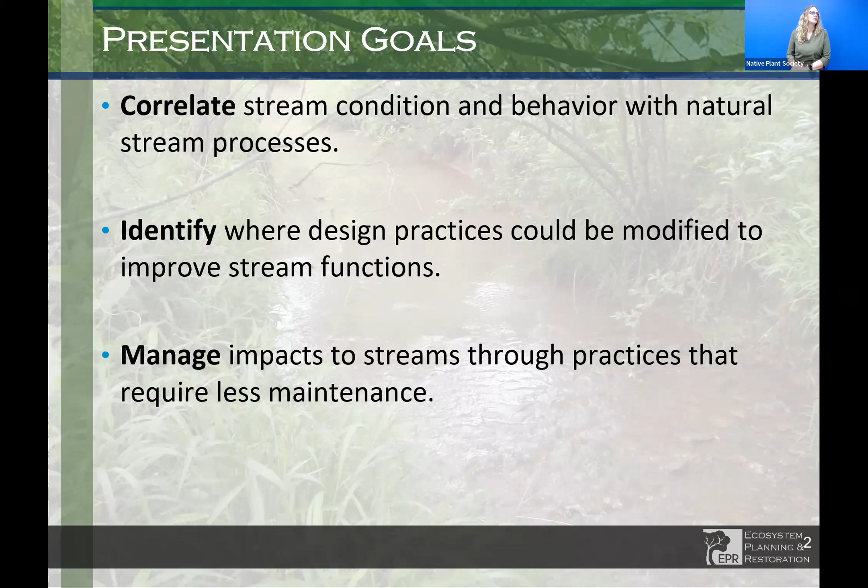So we will be talking about natural stream functions and processes, channel instabilities, and we have a local case study to show you, and we'll do questions and answers when we're finished.

One of the questions we like to ask - and it kind of depends on who you are and your worldview and experiences how you answer this question - is, what is the function of a stream?

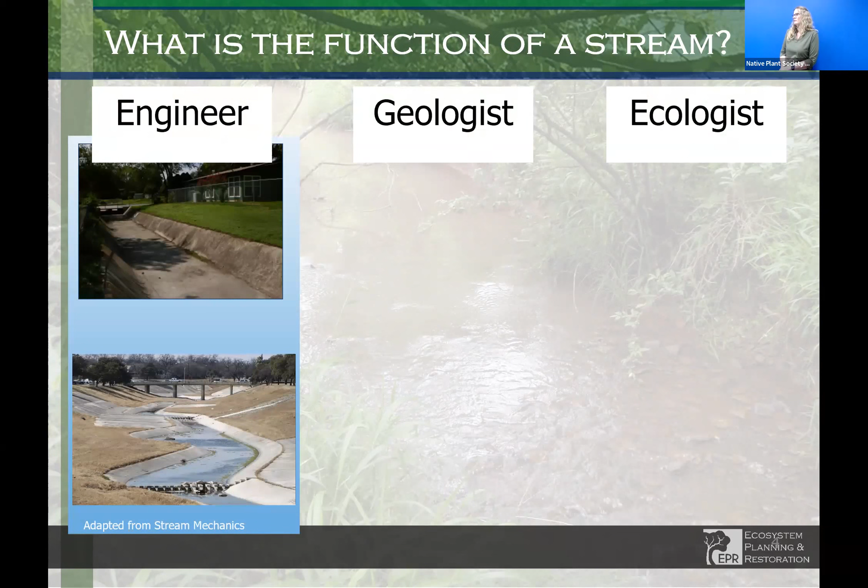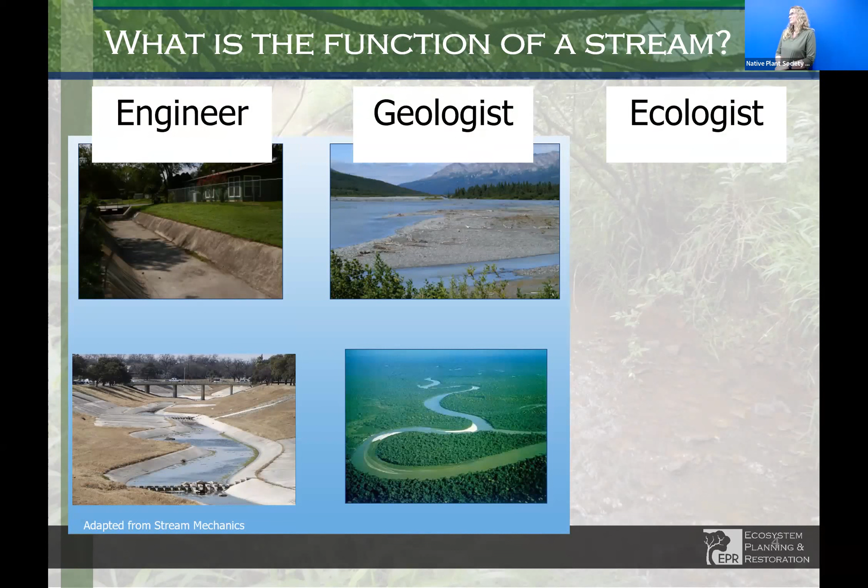If you're an engineer, you might say it's to move water, to get flooding and stormwater out as quickly as possible. If you're a geologist, you might say streams move sediment and help shape the landforms. If you're an ecologist, you may think streams are habitat for aquatic animals and fish.

And all of those answers are correct. Oftentimes, projects get kind of tunnel vision depending on who's put out the project and what the goals of the project are. But we like to think of all of these things when we think of a project.

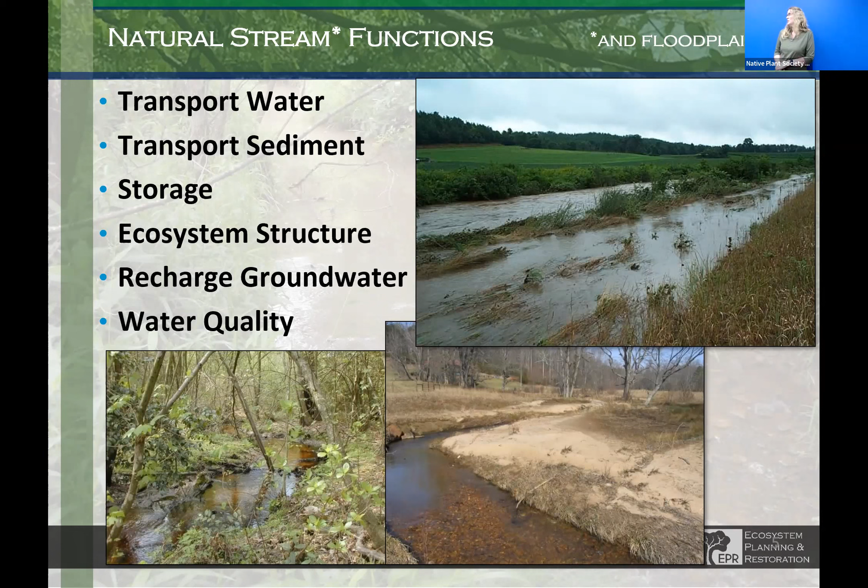So when we talk about stream functions, we also include the floodplain, not just the channel, but the floodplain that conveys the larger flow events. These systems transport water and sediment, provide flood storage and sediment storage, provide ecosystem structure for plants and animals. Sometimes they even recharge the groundwater, and they have a lot of water quality benefits.

So when we think of streams, we kind of zoom out. The first thing we want to think about is where are we in the watershed? Different streams will behave and have different characteristics depending on where you are. If you're up in the headwaters, you might have a steeper stream with a different shape and plan form than a stream down in an alluvial valley, where it's flat slopes and you have this nice meandering stream system.

So whenever we look at a stream and a potential project, we need to think about where we are and what kind of stream is appropriate for this site. What should it look like? What does it look like? And what can we do with it?

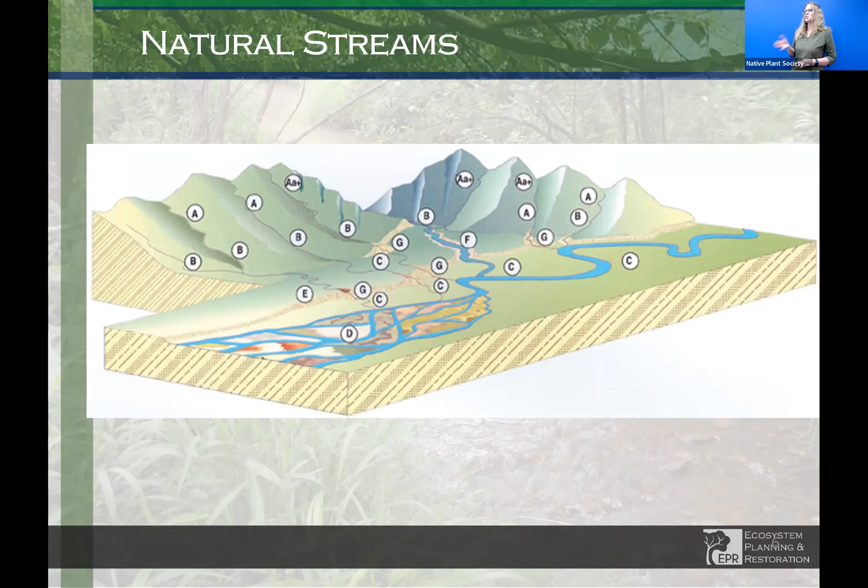It's up in the mountainous areas, it's a steeper slope stream. Or if somebody says, I'm looking at a C stream, we know that's got to be in an alluvial valley and it's probably a meandering stream. So it's a good communication tool just to talk amongst ourselves, so to speak, and so we know what we're dealing with.

This is another representation of that same classification, but it shows in profile what these kinds of streams look like when we say an A stream, B stream, etc. It shows a typical cross-sectional view of the kind of stream we're looking at, and also what it looks like in plan view - what are the patterns we're seeing?

A and B streams are straighter, steeper-sloped streams, whereas C streams and E streams are flat-sloped, meandering systems. D streams are braided, multi-channel systems, and then we have Fs and Gs. In our world, especially in this area, when we hear that a channel is an F or a G, that sends flags that the channel has problems - Fs and Gs are generally unstable in this region. So that is how this classification system is useful for us.

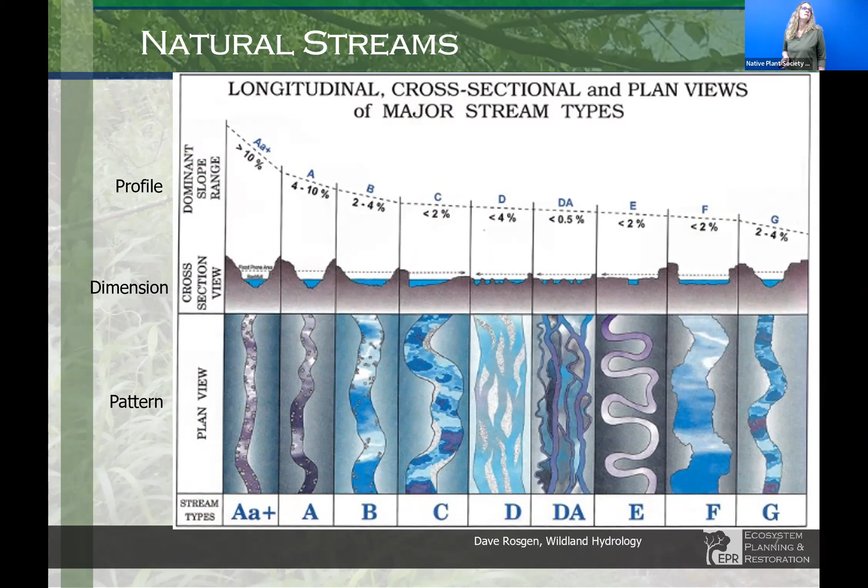Stream dimensions are really important. Depending on where you are and what kind of stream and valley type you're dealing with, these dimensions are an actual physical, mathematical dimension formed by physics and natural processes. It's universal, worldwide, not something specific to a region.

These dimensions are based on the size of your watershed, so drainage area is really important to know. What kind of land use is going on in your watershed and near the stream system, what vegetation is present or absent, the type of soil and geology, your topography—mountainous or flat slopes—and of course climate will vary from place to place. All of these things determine a stable dimension for a natural stream to function properly.

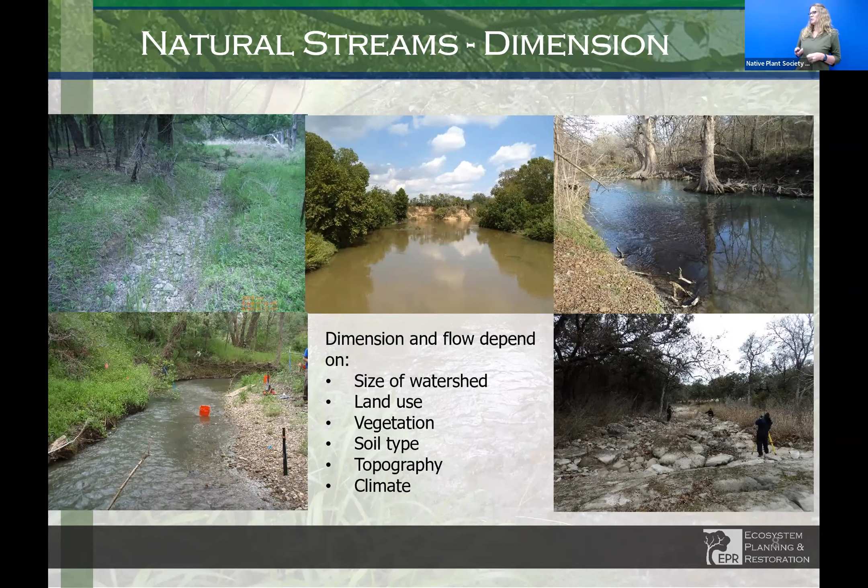So our goal when we design is to figure out what that dimension is—what is going to be a stable dimension for our stream, for our location.

Some typical stream patterns most people are familiar with are meandering stream systems. These are the squiggly ones found in alluvial valleys. They're generally broader streams, down in the watershed—not necessarily at the downstream end, but definitely beyond the headwater point.

Meanders actually serve a purpose. They are natural energy dissipators for floodwaters that come through. As the flow comes through and meanders through these bends, it slows the water down.

You get scour pools that form at the outside of the bends, and point bars form on the inside of the bends. They're very important—basically it's energy dissipation horizontally as the stream moves downstream.

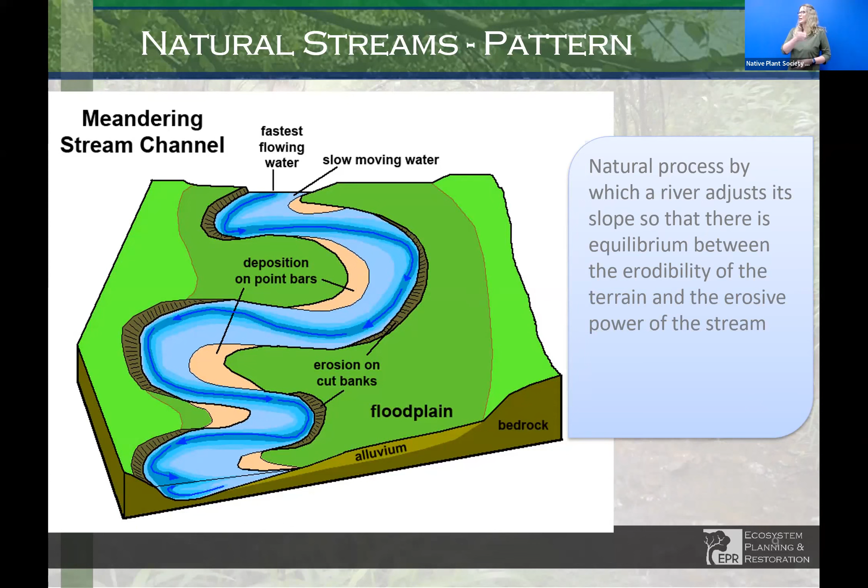In a straighter, steeper stream system, instead of energy dissipation horizontally, it dissipates energy vertically. So you get a series of steps and then a pool, a step and then a pool. That's how the stream naturally dissipates that energy and keeps the balance, so you don't get a stream that's eroding or degrading.

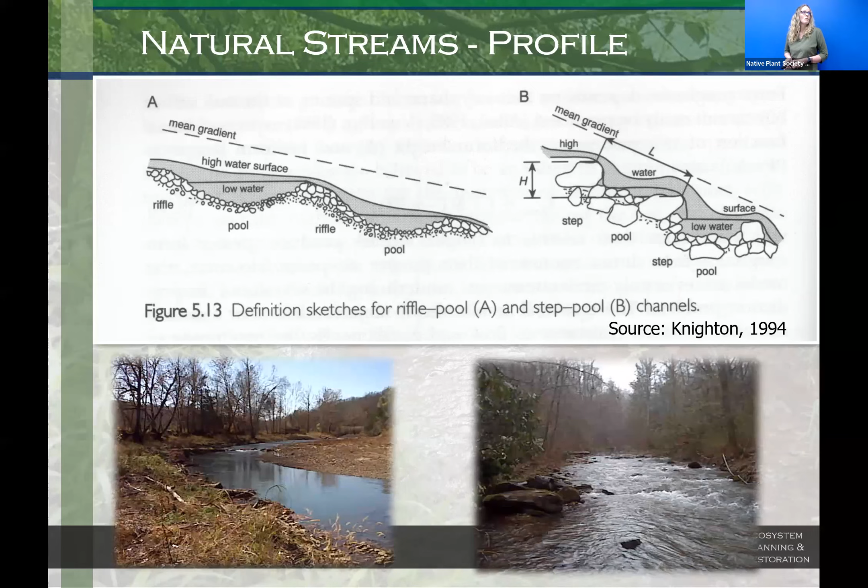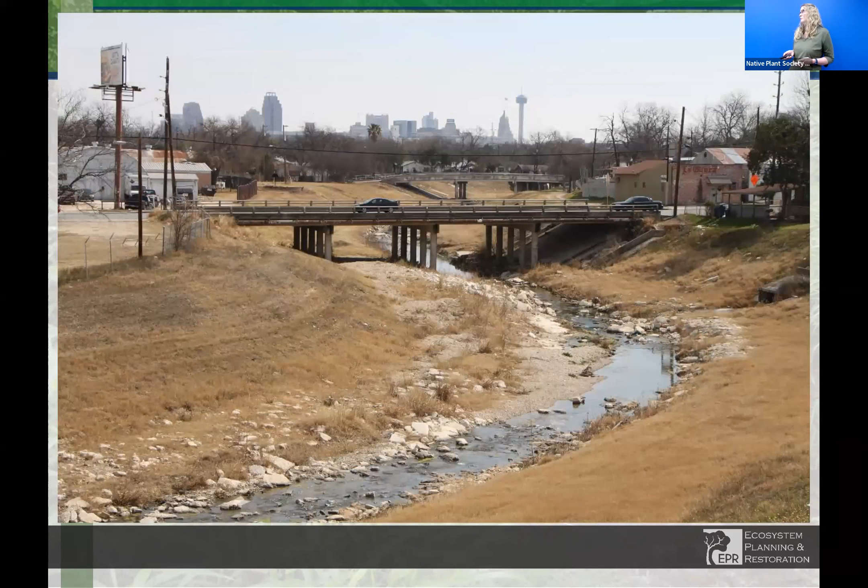It doesn't matter if we've come in and engineered a channel—natural stream processes are always at work. If you're trying to do something that goes against natural stream processes, you're going to know, because you'll see your stream start to change and try to come into equilibrium again.

This is a local example: San Pedro Creek. It was channelized several years ago for flood control. Originally it was a trapezoidal channel with a flat bottom, and over time a low flow channel has developed. We're starting to see that meander bend process happening—erosion on the outside of the banks and deposition with point bars forming on the inside of the banks.

Where on the creek is it? That is just upstream of I-35, I think. I can't remember exactly where this one is—I can see downtown, I think you're right, like near the Pearl area, heading towards the Pearl. Is it center or on the west side? I think it's on the far west side, yeah, with the tower there. Okay, well, it's in San Antonio. I've seen some of these, they all look the same to me, so, okay.

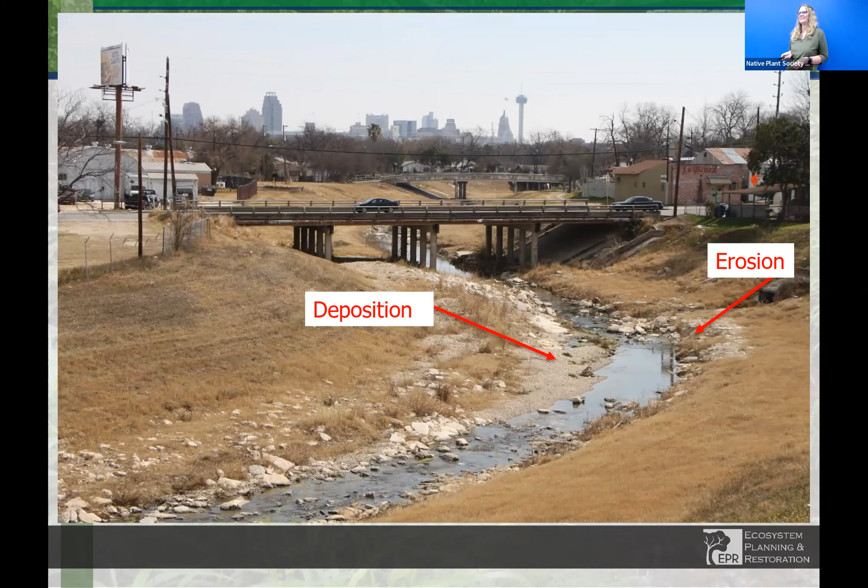This is another example of a channelized creek that was probably put in when the subdivision was developed. Most likely it had some meandering to it, given the slopes here, but they came in and straightened the channel. I'm sure this was a trapezoidal flat bottom channel, and over time this low flow channel has developed, and you can even see it's trying to meander again by the flow vectors.

Over time, if it's left on its own and there's no maintenance done, it will start to meander. You will start seeing erosion and the changes.

We're talking about trapezoidal bottoms, the concrete channels inserted on the bottom of this one. Sometimes they're concrete, sometimes it's just the shape. Can you repeat the question for the people on Zoom? The question was, when we say trapezoidal channel, are we talking about concrete bottom channels? The answer is they could be concrete.

A lot of them are completely concreted. Some of them are not, they're just grass lined. I suspect this one was just grass lined, and nature does its thing whether we want it to or not. Over time, if this is left on its own, these neighbors will get pretty upset when the creek starts to encroach on their property. So maintenance is an issue for these kinds of streams.

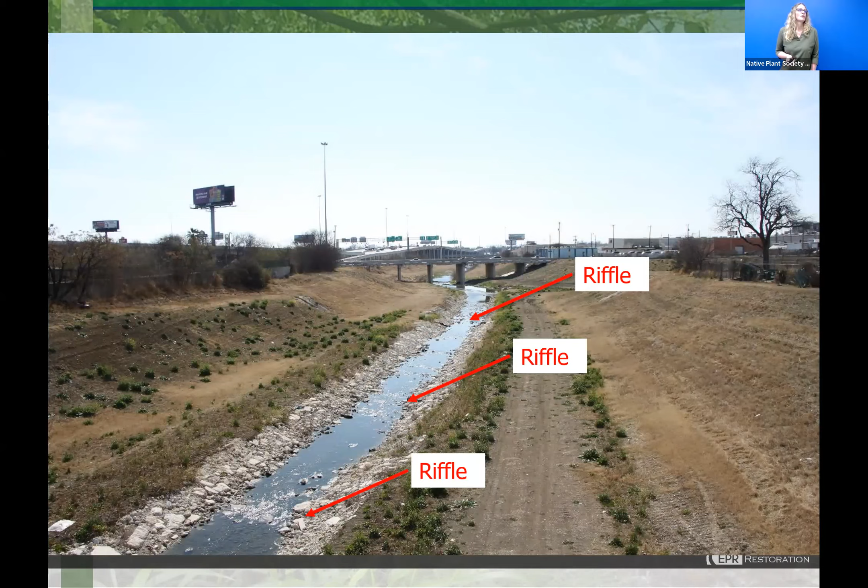So what are some of the impacts that cause the channel to respond this way, other than just the channelization type of thing we just saw?

There are many things that can happen to a channel that are direct impacts, meaning it happens to the channel itself. There's dams that are built, stock tanks, inline stock tanks, big dams, big reservoirs, again channelization and levees. Some places there's mining that occurs even in the main stem, or just off to the side, which has impacts to the stream.

Some places there's beaver activity, and either the beaver have come in and are starting to disrupt, or the beaver are taken out, which can also cause problems when the beaver leave. We don't have that problem here so much, but in other places it is a big issue.

Point source discharges are like stormwater outfalls from storm drain systems, just dumping stormwater straight into the creek. That could also include wastewater treatment plant discharge locations as well.

Floodplain encroachment is a big one. Folks like to squeeze the creek corridor as much as possible to gain as much land for development as they can, and that has a major impact on streams.

Snagging and wood removal—there are agencies that do that, and the primary purpose is to keep flow moving. There's a flood control component usually involved, but the wood in the stream actually plays a role in natural stream processes, mostly habitat wise, but it is important too.

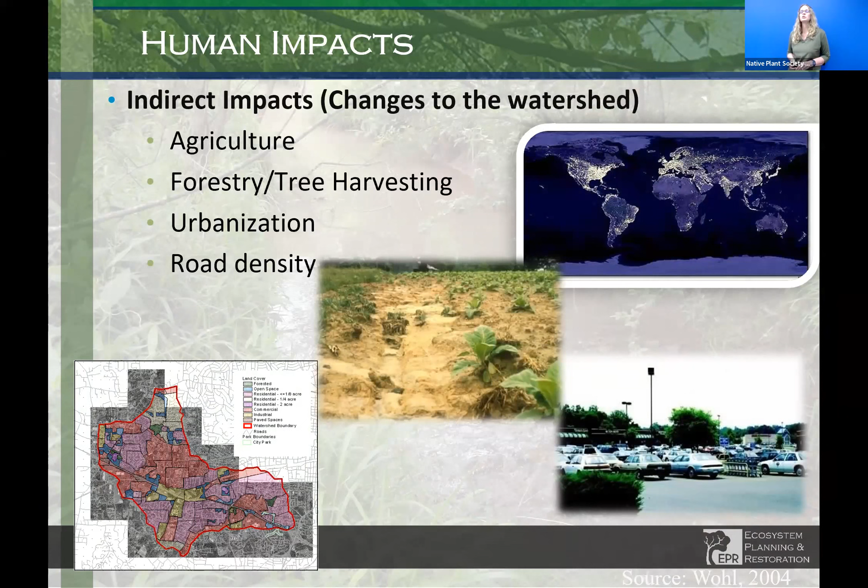Indirect impacts are things happening outside of the creek, in the watershed around it. Agriculture is a big activity that takes place. There's forestry and tree harvesting that occurs. Urbanization is the biggest impact, and along with urbanization comes road density.

So here's the Lane's diagram again. To demonstrate how this works, let's say we have an impact—say somebody comes in and wants to straighten the stream. Well, when you straighten a stream, you steepen the slope.

Or maybe they want to put in a storm drain outfall that adds more flow to the system than was currently there. You can predict that if you increase the slope or increase the water, you're going to see that stream start to degrade. That means, and degradation indicates erosion, material being moved, the channel changing shape.

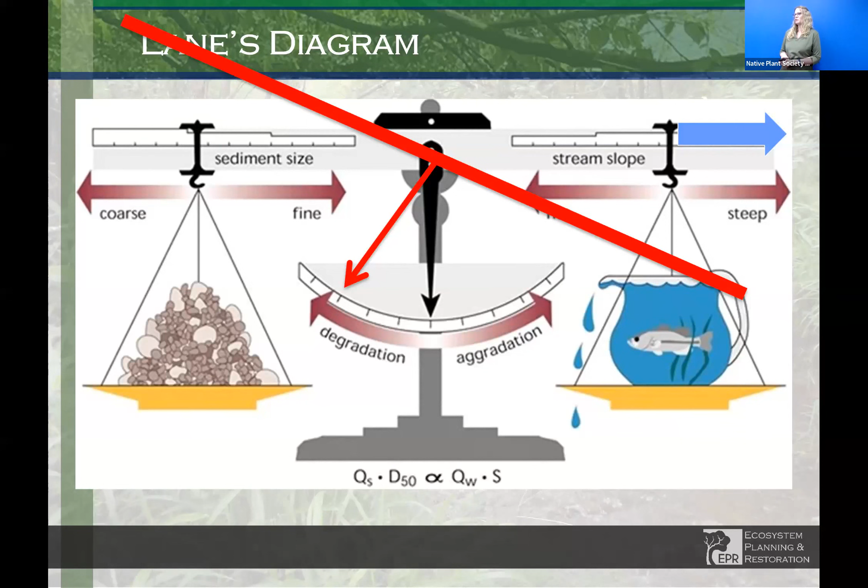The other way is, let's say somebody dams up the stream upstream and suddenly you don't have the flow you used to.

You will see aggradation is something you can predict will happen in the stream, because the stream has lost the power to move the sediments that are in it. It can no longer pick up the same size sediment load that it did before and move it, so you're going to start seeing it fill in.

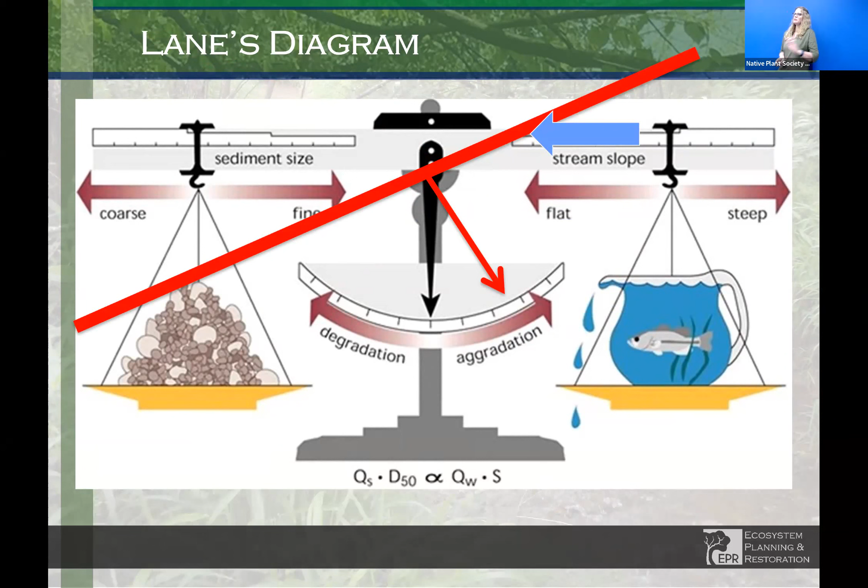This is a cool diagram to help you predict: if this happens, this is probably going to happen. Some of the causes of instability we've already talked about. Increasing the slope is a big issue. Increased runoff into your stream, changes in the sediment load or size, loss of riparian vegetation and that riparian corridor, and loss of floodplain areas.

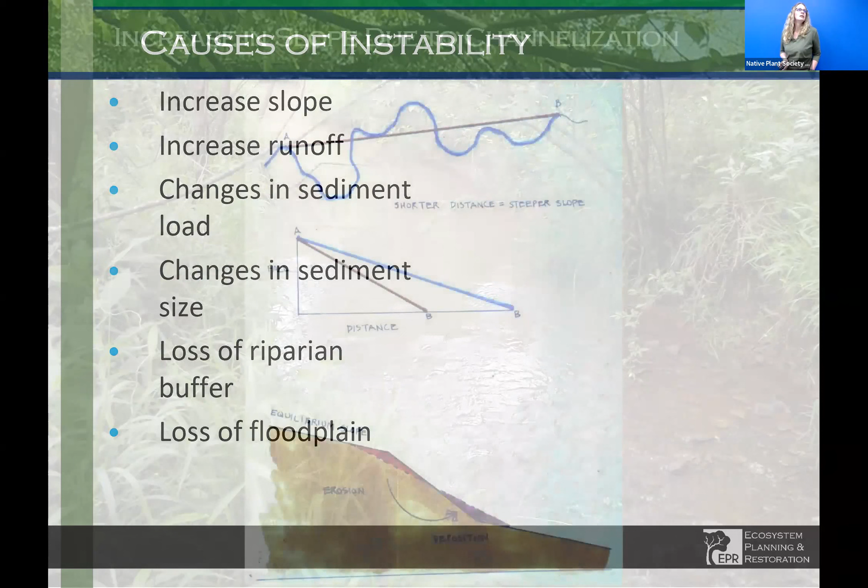This is a demonstration of what happens when you channelize a stream. We have a nice, pretty blue meandering stream, and someone wants to channelize it for some reason. The brown line is the channelized new streamline, so you're getting from point A to point B much quicker, a shorter distance. When you do that, you increase the slope of that channel. The channel is going to respond, and it will respond until it finds what we call equilibrium slope.

Essentially, you'll start seeing the stream degrading first, meaning it will start to downcut. It'll go through a series of evolution processes, what we call channel evolution. It'll start to downcut, reach a point where it stops downcutting, then start to widen as the banks fall in. That sediment gets moved downstream, and eventually it comes to this equilibrium slope. Sediment scoured out upstream is deposited downstream until the stream picks the slope that it likes. It can be a very destructive and expensive process to stop.

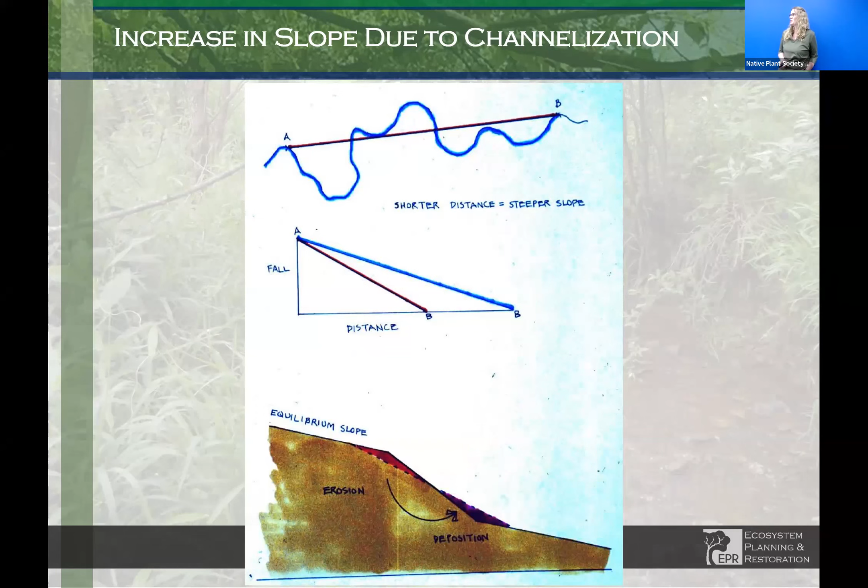So when we do stream projects, these are things to think about in terms of maintenance. If I do this, what is the stream going to do? And what am I going to have to do to stop it from doing that?

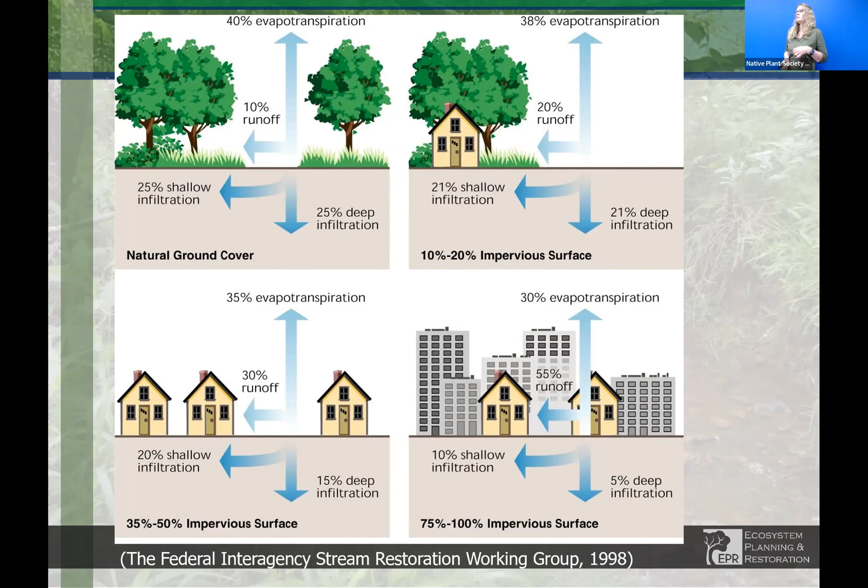Increased runoff - the primary reason is increase in percent impervious surface due to urbanization. When you increase your paved areas and impervious areas, you increase your runoff. If you have natural ground cover, about 50% of the water will infiltrate and about 10% will run off, with the rest lost to evapotranspiration. Once you get to 75 to 100% impervious cover, you may only have up to 15% infiltration, but 55% runoff increase.

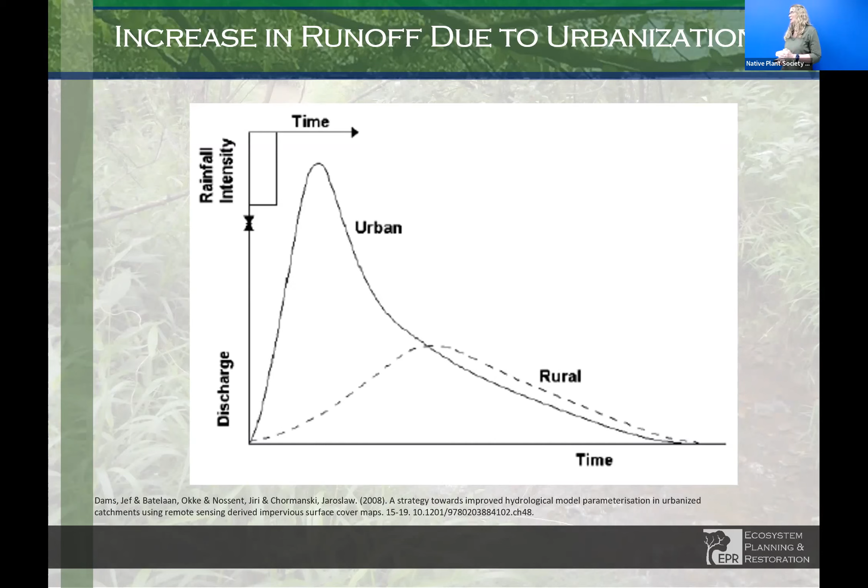This is another way to look at it. These are hydrographs representing a flood flow coming through a system. The dashed line is a rural, pre-developed hydrograph: it starts to rain, flow infiltrates, reaches a point where it starts to run off, you reach a maximum peak flow, then the falling limb brings it back to normal. When you pave, suddenly you don't have that water that can infiltrate, so you get a huge rise in runoff immediately, a higher peak, and higher flood volume. Eventually it goes back down, but your stream has to absorb those changes, which is a big deal.

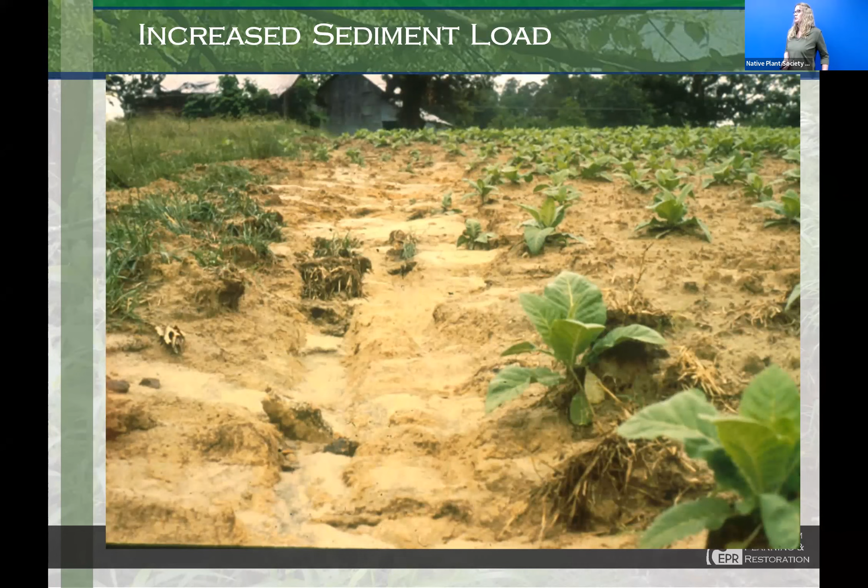Increases in sediment load can come from different things. Any changes out in the overbank that cause soil to loosen and make it to the stream can be a source. Agriculture often causes loss of soil due to farming practices. During new development, when they clear out all the vegetation, you'll see soil entering the system that wasn't there before.

A decrease in sediment load can be due to somebody installing a stock tank or an inline pond. Suddenly you've stopped not only the flow, but you've stopped the sediment from being able to continue down the stream system.

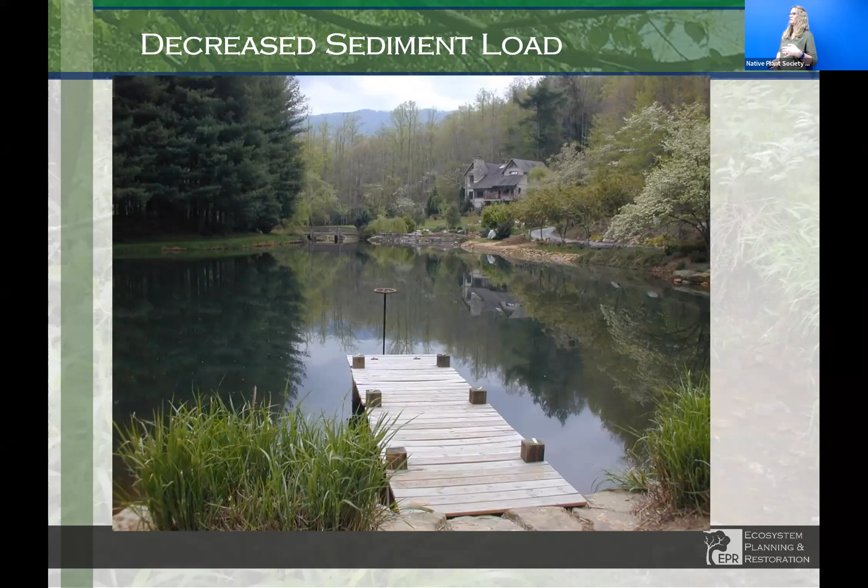Right now, if he were to stop the head cut with some treatment, he could probably replant upstream, and that would take care of it from continuing upstream. But if he didn't do anything about it, he's going to have a canyon through his ranch.

Some of the current things people do to try to stabilize unstable creeks right now are typically: let's fix it in place. We've got a bank that's eroded, it needs some sort of fix. They might resort to hardening, like putting concrete on just the bank. They might concrete the whole channel. They might use gabion baskets or something like that. Sometimes those things are sufficient to fix the problem, sometimes they're not.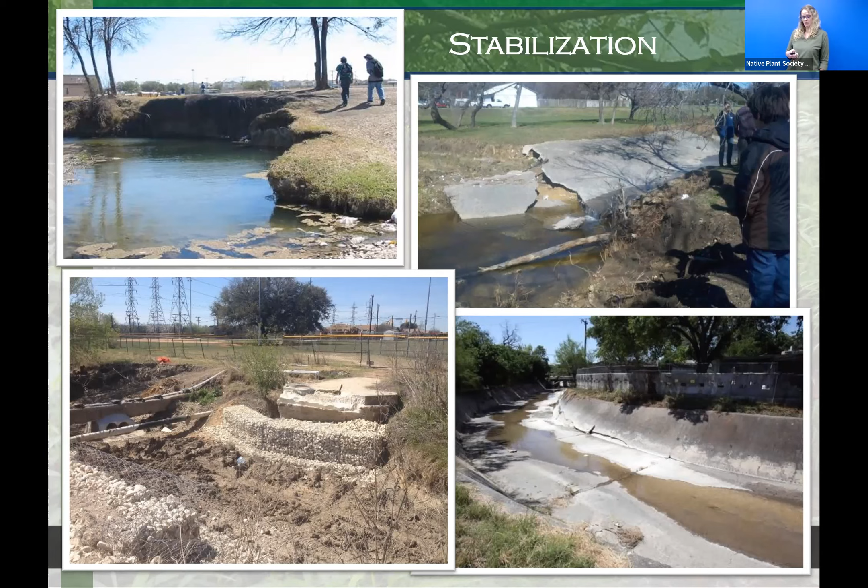Vegetation management—one of these is a park, and the other is just a drainage way maintained for flood control. Common practices are to mow right up to the edge of the bank, get rid of any riparian areas because they don't want to take care of them. It's cheap to maintain that way. But when doing that, they start having a maintenance problem in terms of erosion. So this is where vegetation management comes into play.

There are a lot of reasons why people don't want a big, woolly creek in the middle of an urban area. Some people don't like the way it looks—they prefer this look instead. Some people don't want trash getting hung up in the vegetation in an urban setting. And some people don't like nefarious activities that take place in wooded areas in their backyard.

So there are reasons, but there are ways to manage what kind of vegetation goes in, how tall it gets, how wide it is—those kinds of things where we could come to some sort of compromise instead of ending up with that.

When a creek erodes upstream, that sediment gets taken downstream and deposits somewhere. Typically you get deposition and sediment accumulation where the cross section of the stream widens all of a sudden—so it loses stream power.

You'll see this a lot at bridge crossings, where you have a creek that's normally about 10 feet wide, and all of a sudden there's a bridge crossing that's 100 feet wide, typically sized to pass the 100-year flow. But when you do that, the stream loses all its stream power, and all the sediment gets dumped right there. So it becomes a maintenance issue—they have to go in and dredge to maintain flood conveyance.

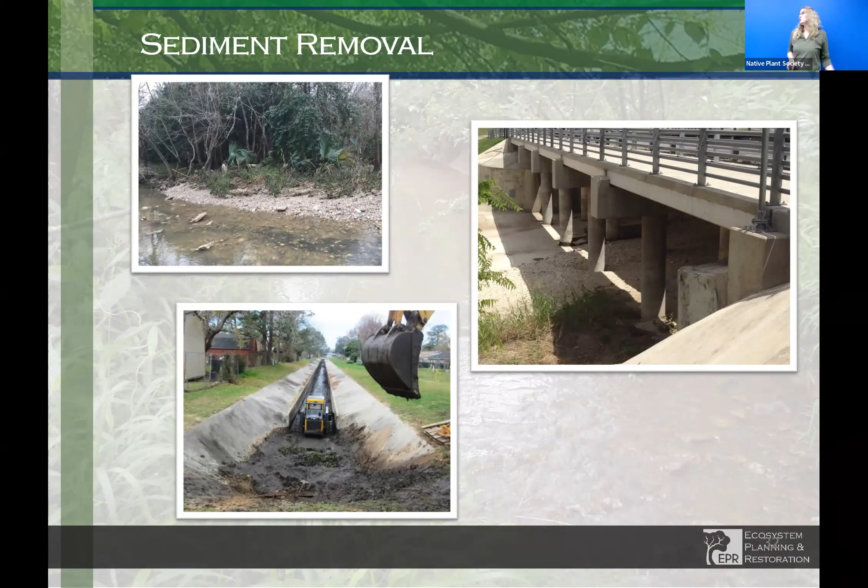Infrastructure repairs become an issue too. Downstream of culverts, often you'll see a scour pool form as flow comes blasting out of those pipes and over the road in this case, and this pool will form, and sometimes it ends up undermining the structure.

Utilities historically have been put in stream corridors for gravity reasons, especially gravity-fed systems—it's the low spot, so it makes sense to put it there. However, they cause a lot of problems. They become obstructions in the creek themselves, and the utilities start to be exposed in the banks due to erosion.

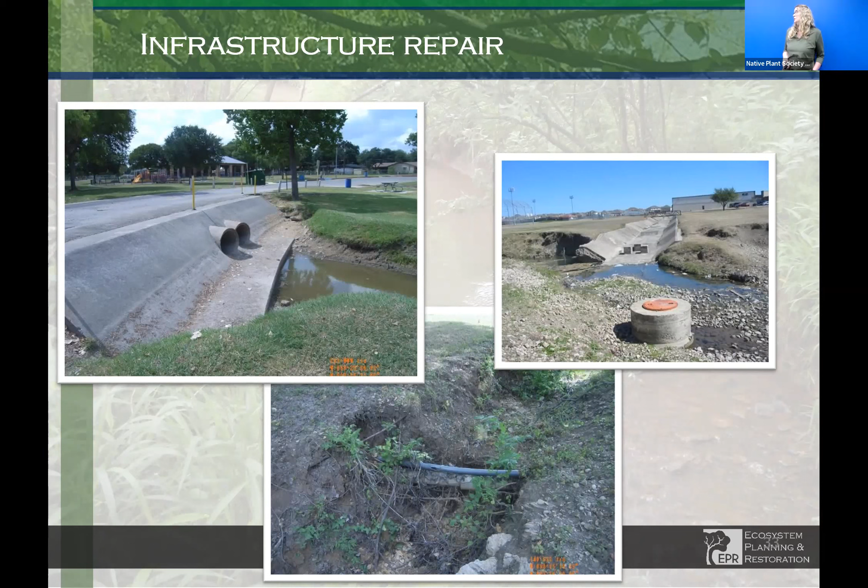So LeeAnne is going to talk about, now that we know all of these problems, what can we do that's different?

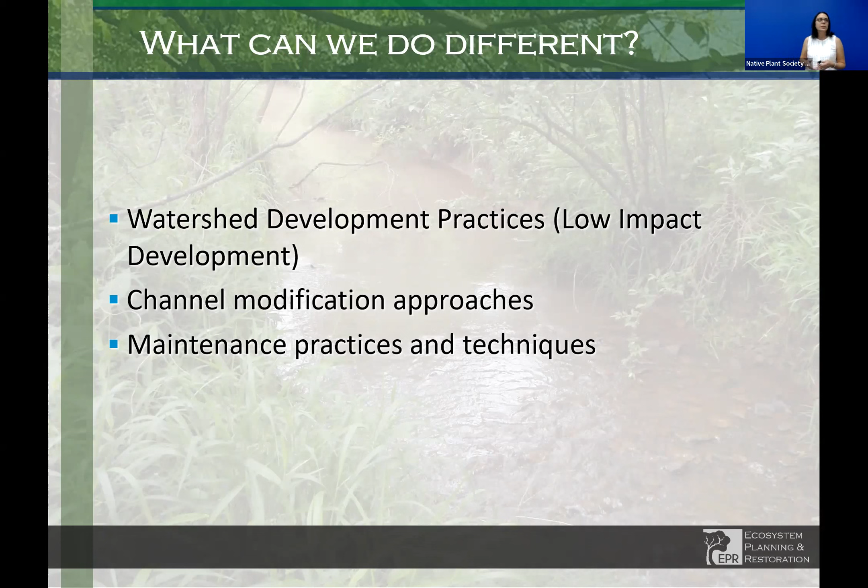There's a low flow channel that conveys just the base flow. Then there's something called the bankfull channel, and that conveys the storms that happen on a pretty frequent basis, every 1 to 2 years. That bankfull dimension and area is really the basis of design for natural channel design. It gets pretty technical, but that's a design parameter that we use.

And then there's the larger part of that cross section, that's the floodplain. That is probably what we typically think of whenever we think of a channel floodplain, like the 100-year flow, a floodplain that's 100 feet wide, 200 feet wide. So we're thinking about all of those flow regimes whenever we're designing a project.

But traditionally, like in a channelized stream, the shape of that cross section is uniform across all of those flow profiles, so you just start stacking water on top of each other. Whenever you do that, you start to see increases in velocities and shear stresses. So while that may be efficient to get a lot of water out of an area, that's kind of why we have to come back in and maintain these channels - because the water wants to move.

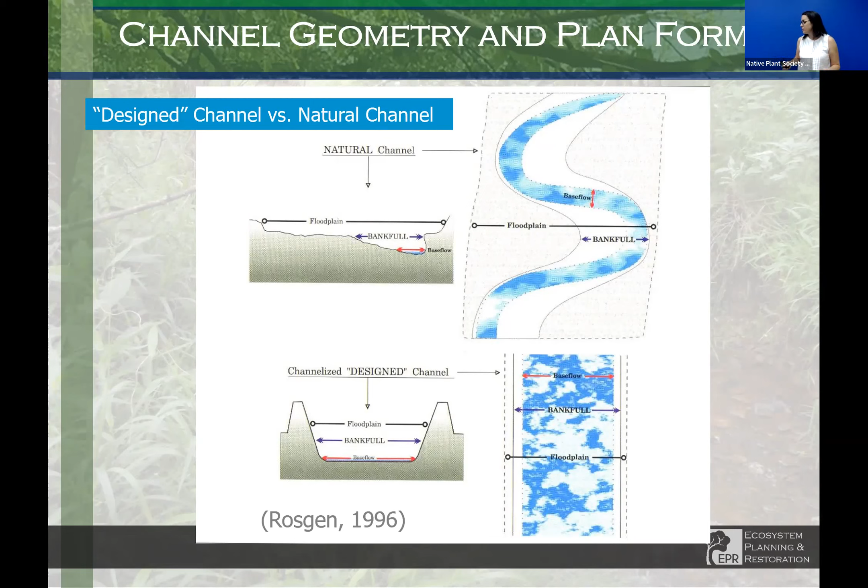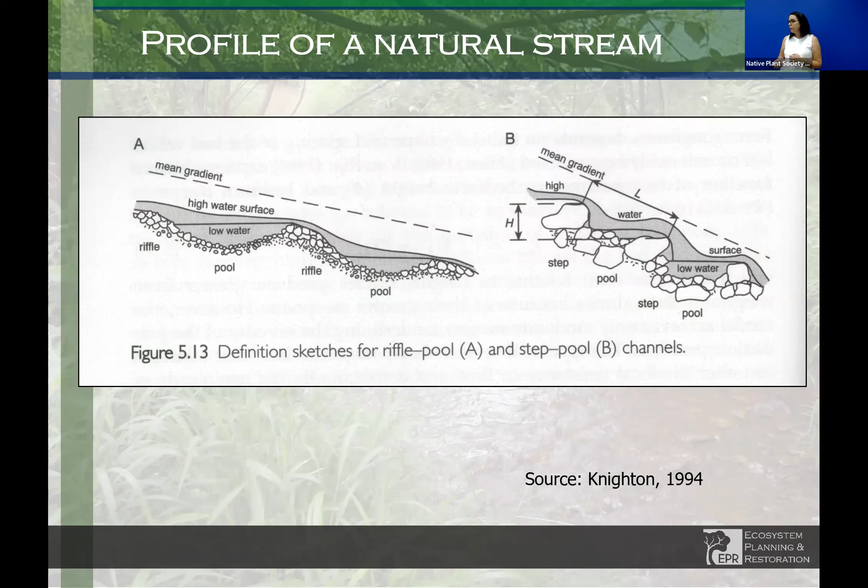Another thing we consider in our designs is the profile. If we're designing a meandering stream, we put in riffle pool sequences to allow that energy dissipation, or if it's a straighter stream, we put in structures to create that vertical fall to allow it to dissipate the energy. We'll talk about what those structures are that we can put in the stream to achieve that natural profile.

These in-stream structures have different purposes. Sometimes we want them to just hold the grade or hold the elevation of that channel. Sometimes we want them to provide extra lateral stability on the banks where it's needed. But in all cases, we're thinking about energy dissipation, and just through inherently having a variety of in-stream structures, you're creating a lot of different habitat conditions for different species.

Looking at the top, I don't know how well you can see it, but the one with the yellow flowers, that's what we call a constructed riffle. It may not look like much, but it's actually a designed section that's supposed to have shallow water flowing faster, and that is protecting the channel from erosion. A lot of times that'll be upstream of a structure that's in one of those lower pictures. That is something that we call a J-hook, and we use it to get the water off of the bank, those erosive forces, into the center of the channel. I'll show you some other pictures in a minute, but these are just some of the tools in our toolbox.

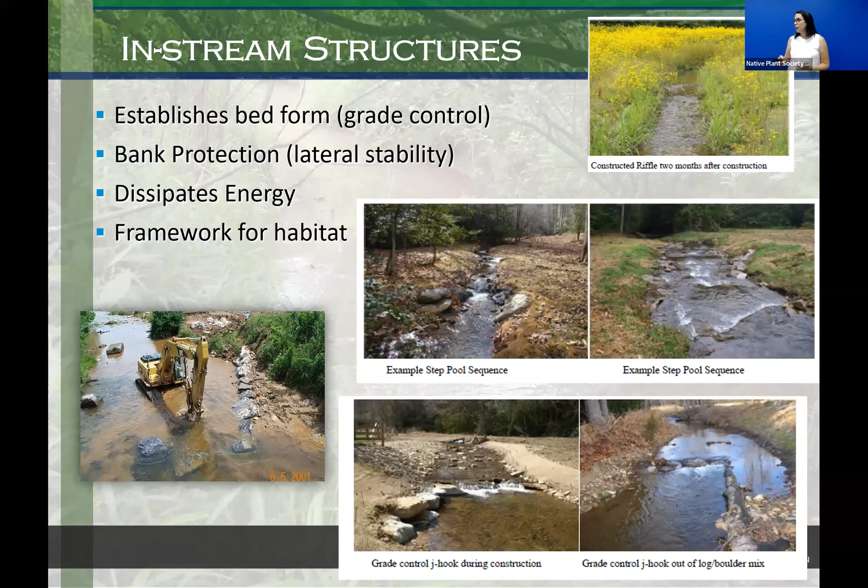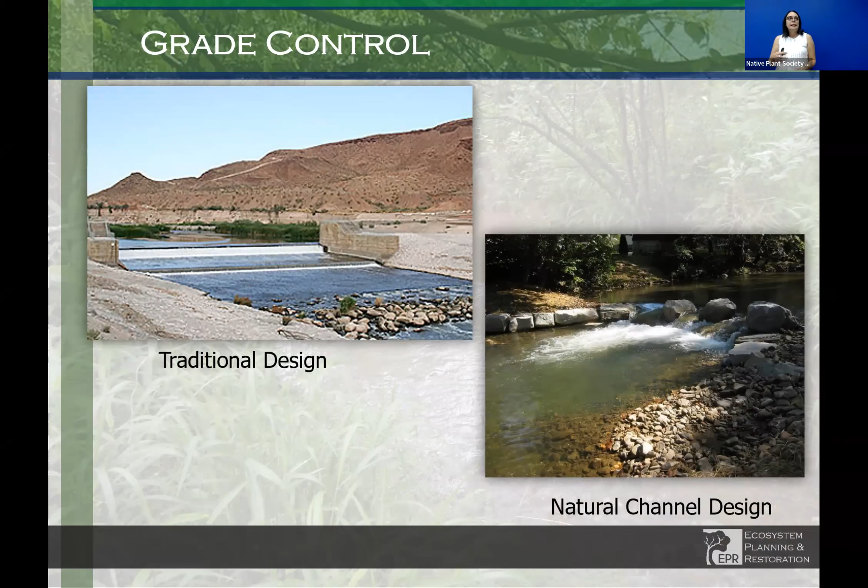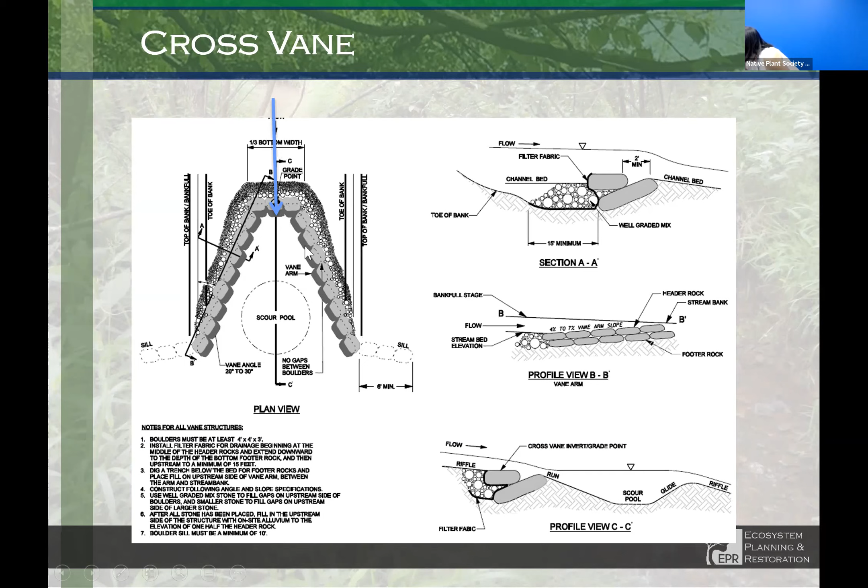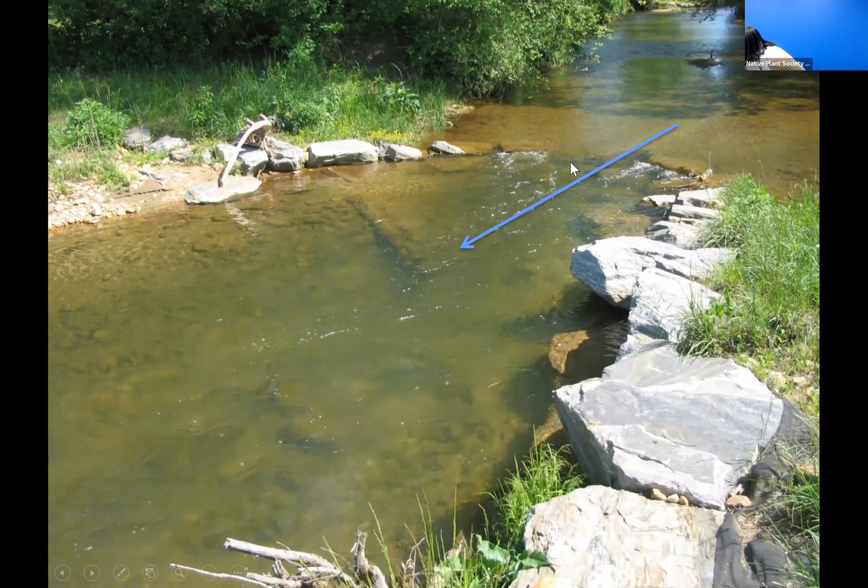Here's another example, and this has a better view of the pool, a constructed pool. You can also see that the header rocks here are flush with the channel invert. We're not creating a backwater situation. A lot of people think this is going to back up water, but it doesn't. In this situation, the water would flow up here on the bank and across the rocks into the scour pool.

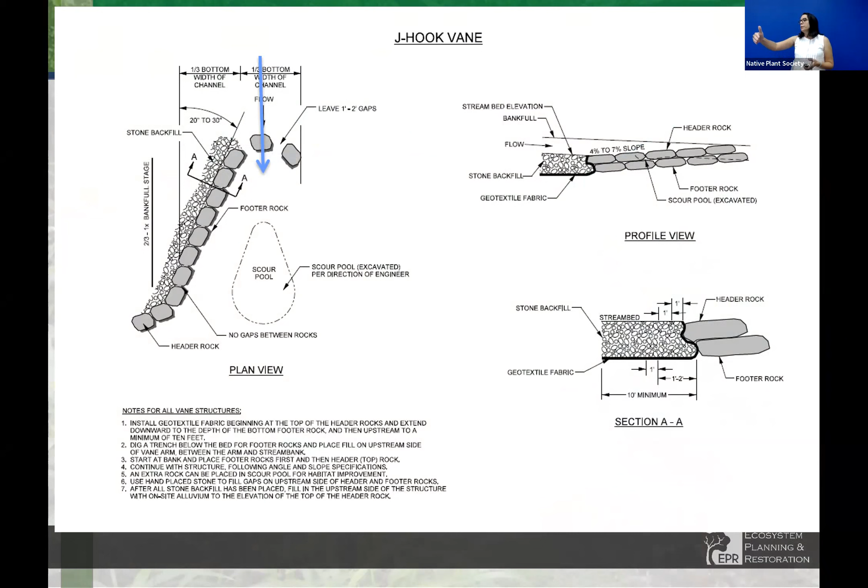So this is a similar in-stream structure. It kind of looks like half of a cross vane, but it depends on where we place this in the stream to determine if we'd do a cross vane or a J-hook. Very similar concept, but we'd use this where there's a turn or meander in the river, where we try to get the water, instead of hitting that high bank or cut bank on the outside of the meander bend, to roll over that rock arm and go back into the center of the channel. So again, we're providing bank protection, giving the stream a way to dissipate its energy.

Depending on the radius or size of that turn, we may need two structures. Here the water is flowing in a different direction, but you can see another J-hook downstream. So the place where it might cut, you're actually directing it towards the middle so it can't make that cut. Correct, both by direction and by the angle of the arms.

So the size of this structure is based on a bankfull dimension, and there's a certain angle of the arm we need to get right for it to function properly. This part of the structure, for the cross vane and the J-hook, we call the catcher's mitt, because as the water starts to go up on the bank, it slows down a little, sediment starts to deposit, and vegetation will grow - that's a good thing. But also, the angle of the arm makes that water go over the rocks into that scour pool.

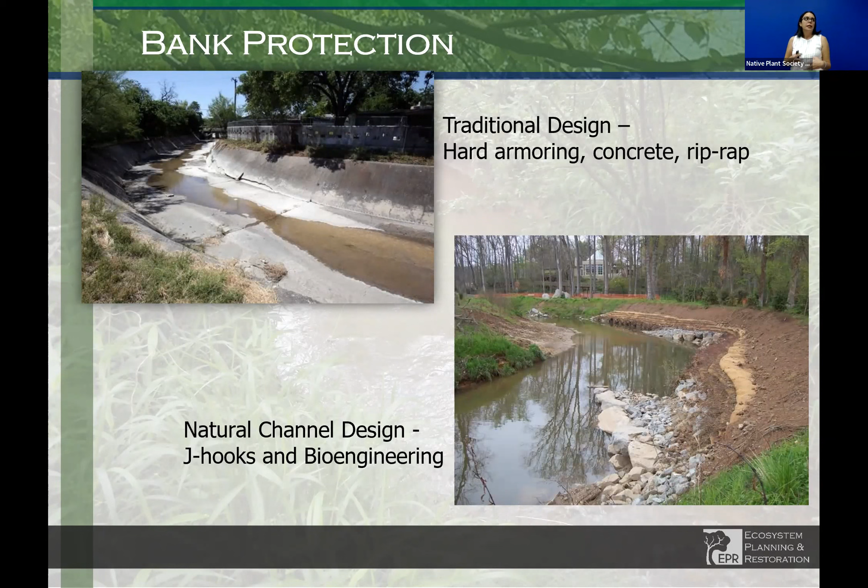So bank protection is another reason why we would use a natural channel design approach. In traditional design, they might hard armor the whole channel using concrete, large boulders, grouted boulders, or gabion baskets, and sometimes that might be the best solution. If you're super confined, super urban, with properties right up to the edge, that might be what you have to do. But we can also achieve all of those project goals in natural channel design using things like J-hooks and bioengineering, which we'll talk about in a little bit.

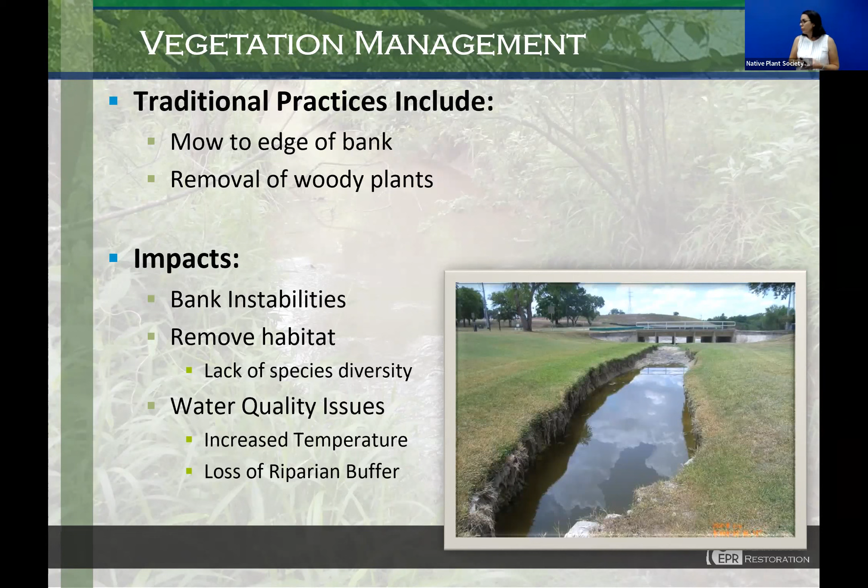As shown earlier, traditional practices we see, especially in park settings, are mowing to the edge of the bank and removal of all woody plants, leaving maybe one grass species, for a variety of reasons. But whenever you remove the plants, you're removing that root system, so there's nothing to hold the dirt together. We start seeing bank instabilities, which contributes to a loss of habitat diversity and leads to water quality issues. Without a riparian buffer we have no shade, so we have increased water temperatures, decreased dissolved oxygen, algal blooms - just a lot of things influenced by that loss of riparian buffer and traditional vegetation management practices.

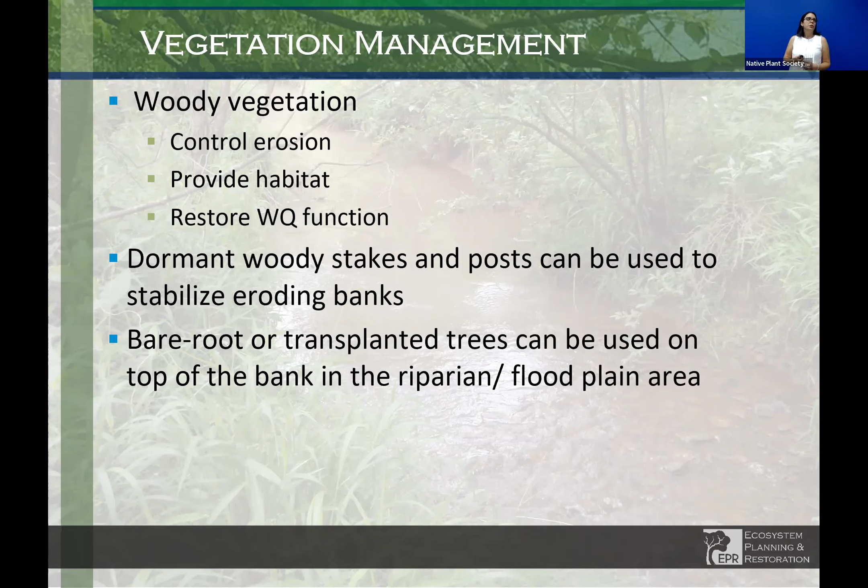So as part of our designs, vegetation is really an integral element. We always consult with local experts as needed, and we want to pick plants that are appropriate for where they are in proximity to the stream or out in the overbanks in the floodplain area. We choose species that will provide erosion control, habitat, and hopefully restore water quality functions, depending on the goals of the project. Often we can harvest woody material on site if we're doing any realignment that requires removing trees, and we may use that material in some of our bioengineering structures. Typically on the top of the bank and in the riparian floodplain area, bare root transplanted trees would be used to start establishing that riparian buffer again.

So in terms of natural channel design, bioengineering just means a specialized use of plant materials to stabilize stream banks. The goal of these structures is to get vegetation established quickly. We build them knowing that in the long term, bank stability is going to come from the vegetation sticking out into the channel and the root mass in the banks.

This is a structure we call a geolift, on a project I'll show you in a little bit. These are just soil lifts - we kind of call them soil burritos. We get a layer of soil, wrap it in coir fiber, and stick live cuttings in between, in this case willows, to hold them in place until they get established and propagate. Those branches and leaves out into the bank act like a flexible armor, providing protection, and the root mass in the banks provides structural stability. Over time, as that root mass gets denser and denser, that's what provides the bank protection.

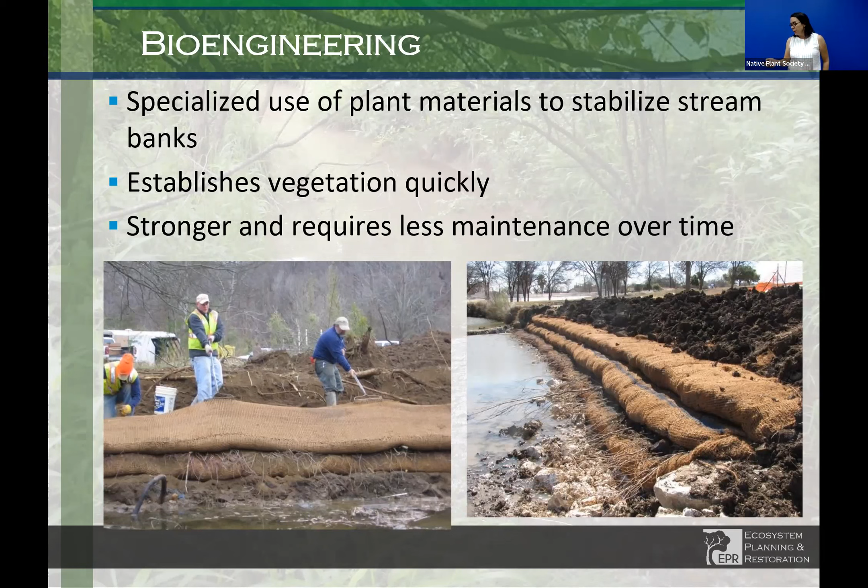We also establish riparian buffers in our projects. A lot of times we're really trying to create that stable channel section.

Oh, it's already... 8 minutes or is it 8 o'clock? 8 minutes. Okay, alright, then I'm gonna go a little faster.

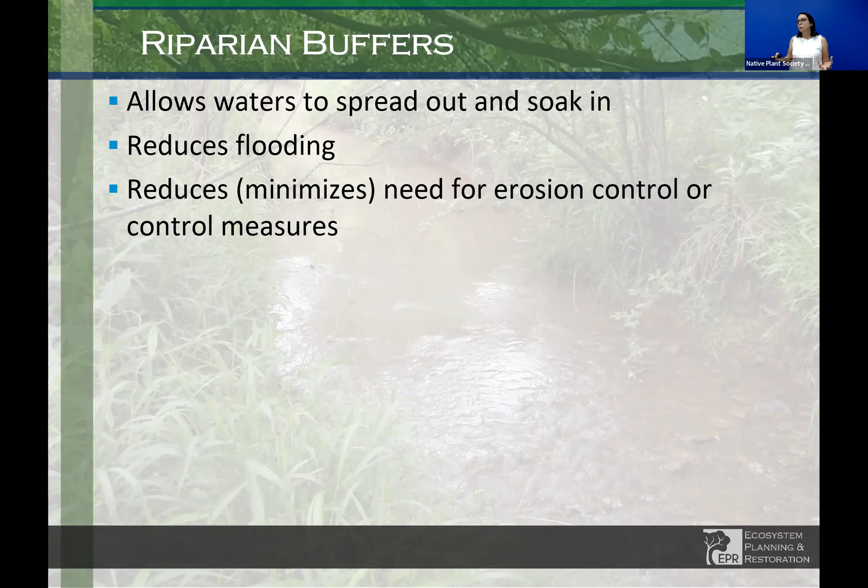The benefits of riparian buffers in our designs is really just to provide that structural support in our stream corridor. Other benefits are it allows the waters flowing to the creek to spread out, soak in, and also to store that water in the floodplain to reduce flooding.

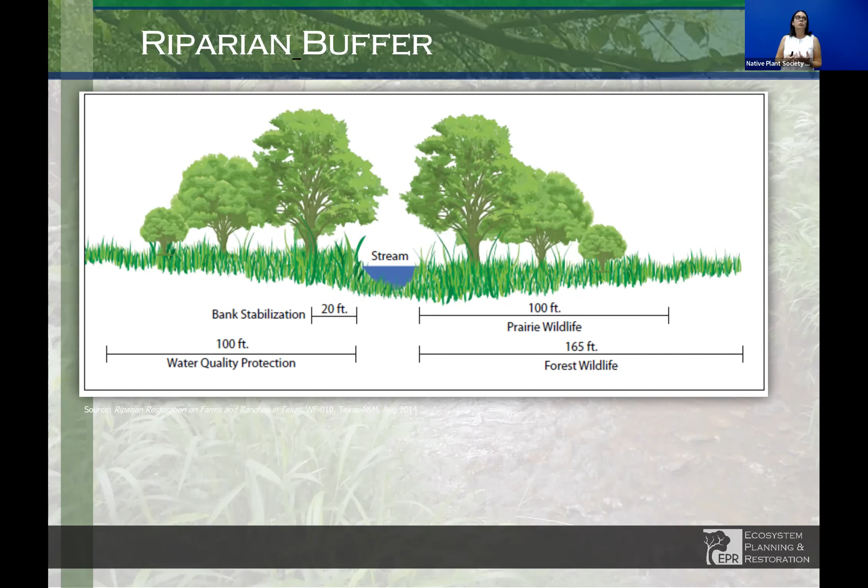Depending on the goals of your project, you might have different riparian width requirements. If it's just stabilization or you're in a confined area, we would like to see at least 20 feet on each side. But if you have wildlife or species goals or water quality protection goals, that buffer width is going to need to increase significantly.

Like Tami said, this is really another place that we have an opportunity to do roadway crossings better. A lot of times you'll see a stream corridor will also all of a sudden become super wide at a roadway crossing. When that happens, the water slows down, all the sediment drops out. You get that aggradation, the accumulation of sediment, which is a maintenance issue and a flood conveyance issue.

Or you may see a really wide floodplain that they've tried to shrink down and force all that water into one culvert. And so there you get really high exit velocities, downstream erosion, which is a maintenance or repair issue.

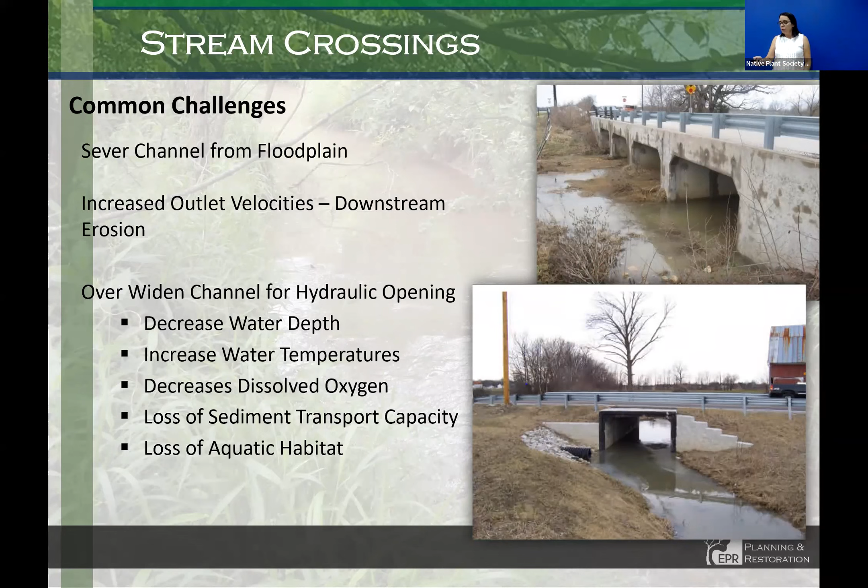So one way to address this is to have a series of culverts, with that culvert in the middle trying to be the same size as that bank full channel, at the elevation of your bank full channel, so that during base flow and bank full flows, the stream can maintain the power to move water and sediment through that crossing.

And then as the floodwaters increase, during higher storm events, you have those other culverts on that bank full bench that can drain the overbank areas.

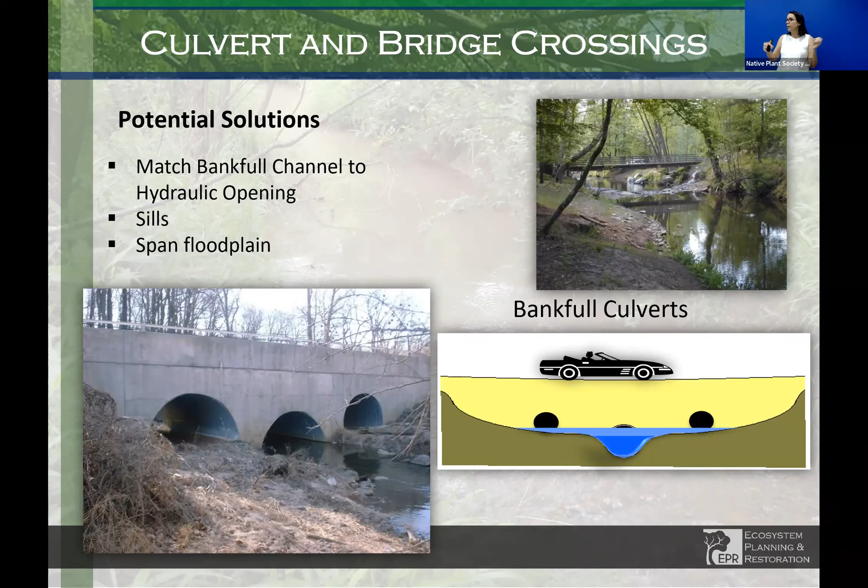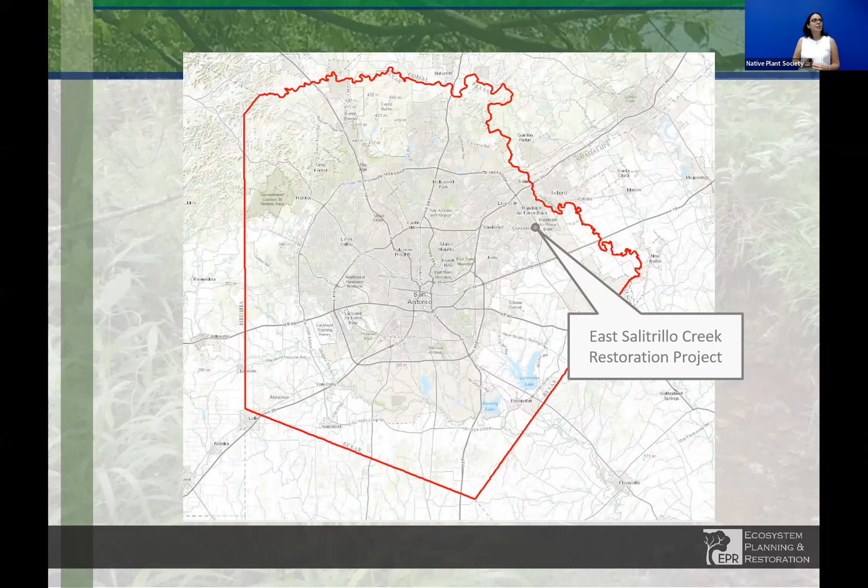Okay, this is a pilot project that we're very proud of for different reasons. We worked on it in different aspects. This is the East Salitrillo Creek Restoration Project on the northeast side of town.

This project was in a FEMA floodplain, so as part of that we had to do a lot of modeling to make sure we didn't impact water surface elevations and to meet FEMA permit requirements. The yellow line shows the limits of our project, where it started and where it ends.

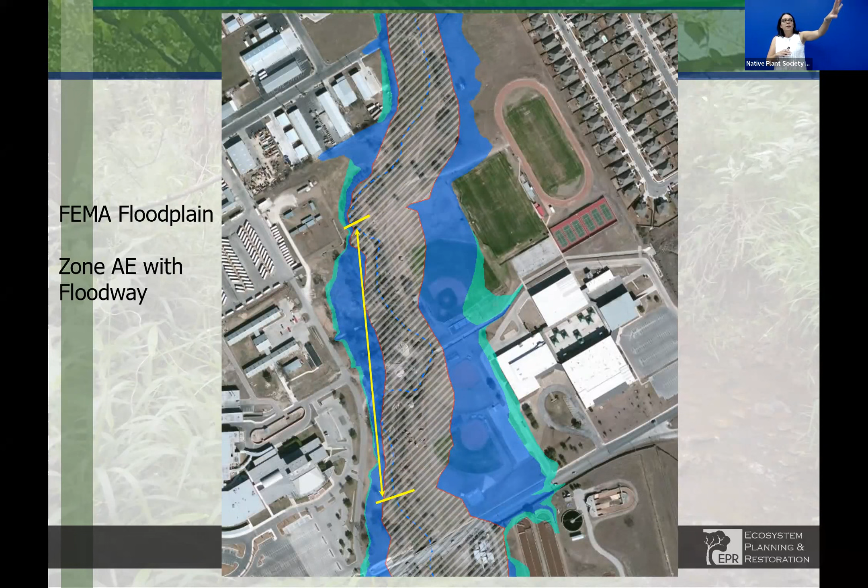Water is flowing from the top of the screen to the bottom. On the left side is Judson High School, and on the right side is Judson Middle School. So this stream was in pretty bad shape.

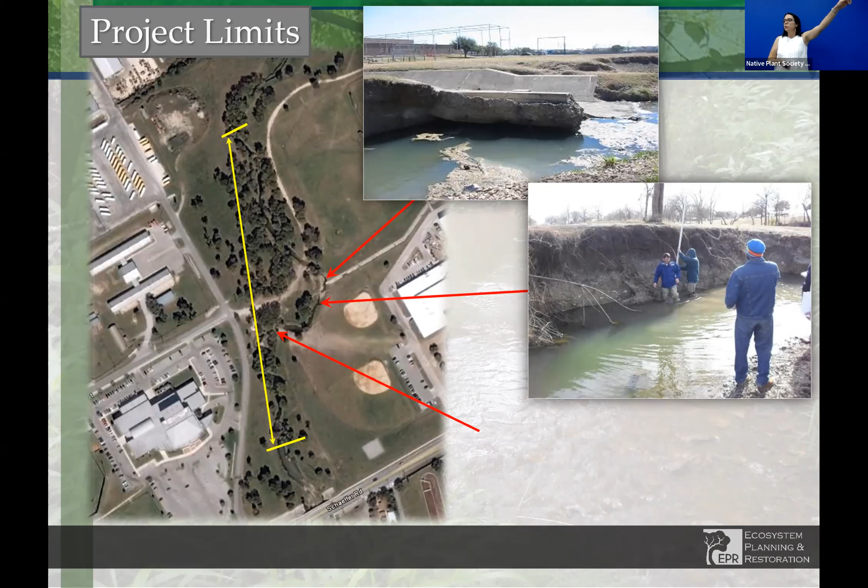The second picture shows the tall shear banks present in a good part of that reach. And then there's a picture missing, but that was another bank that was eroding, moving laterally towards that road on the Judson High School campus, which was a main road where the buses would go from Schaefer Road to the bus parking area, at the top of the screen there.

Here's a more zoomed in picture over on the right, underneath the world map. That's where the concrete channel came into East Salitrillo Creek. You can see the proximity to the baseball field. By the time this project was constructed, that fence post was dangling over the channel because it had moved over so much. And you can see that other meander bend—it looks kind of white right here.

This was an unstable bank that was eroding and moving closer to that roadway. It looks white because the maintenance or repair practice at the time was to put rock cobbles on that area that weren't that big and really only stayed in place until it rained. So it was a Band-Aid fix.

So why the stream looked the way it did—you saw that watershed. It was essentially built out at the time; now it's very close to being built out. It was modified, and there was a dam controlling a good portion of that watershed. The schools' maintenance practices at the time were to mow to the edge of the creek, so there was no riparian buffer. There was moderate incision, meaning it was eroding vertically down, but severe lateral bank erosion that was starting to endanger the road.

We have a cross vane down here, flowing away from us. There's a constructed riffle that looks like it's going into a J-hook. And on the bottom, I think that was the first J-hook ever constructed in San Antonio.

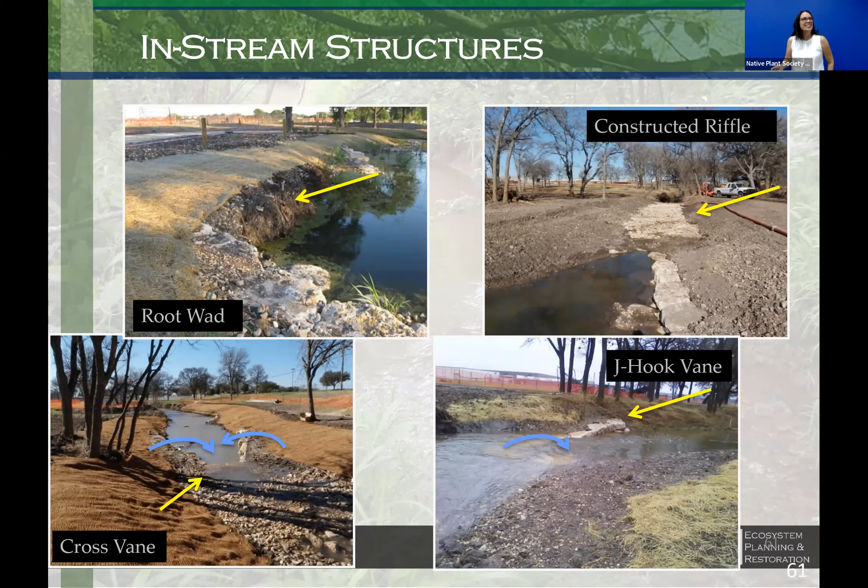Also, bioengineering techniques implemented were the geolift we saw earlier, and then toe wood. The stream was slightly realigned, so we had to dig out a new channel in some parts, which provided a source of wood on site. I believe all or most of that got reused into the bioengineering structures on site.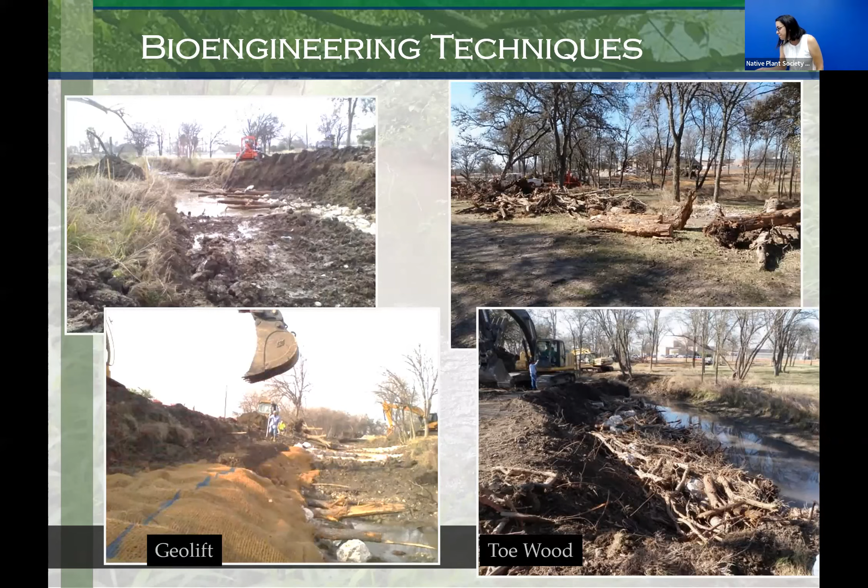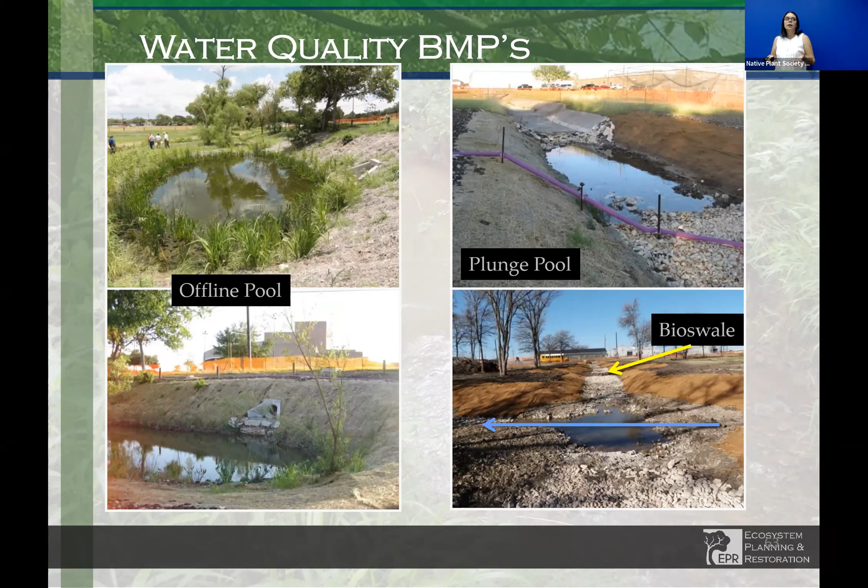On the bottom, it's kind of hard to see, but there was another stormwater outfall where stormwater was treated through a series of bioswales—depressed areas with a lot of vegetation that uptake the pollutants and give it a chance to infiltrate, cleaning up that water a little before it reaches the main East Salatrillo Creek.

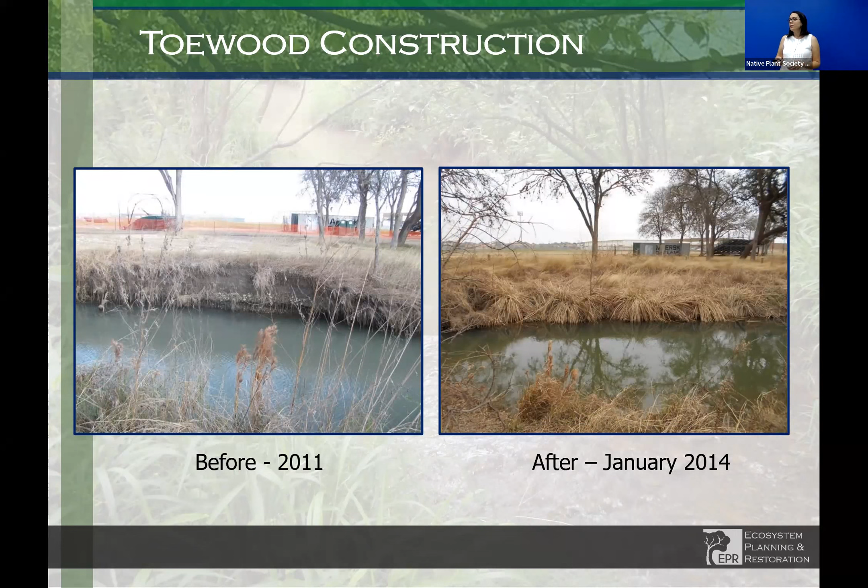To go out there today, it's wild and woolly, and it looks really good. Well, I haven't been out there lately. I hope it looks good.

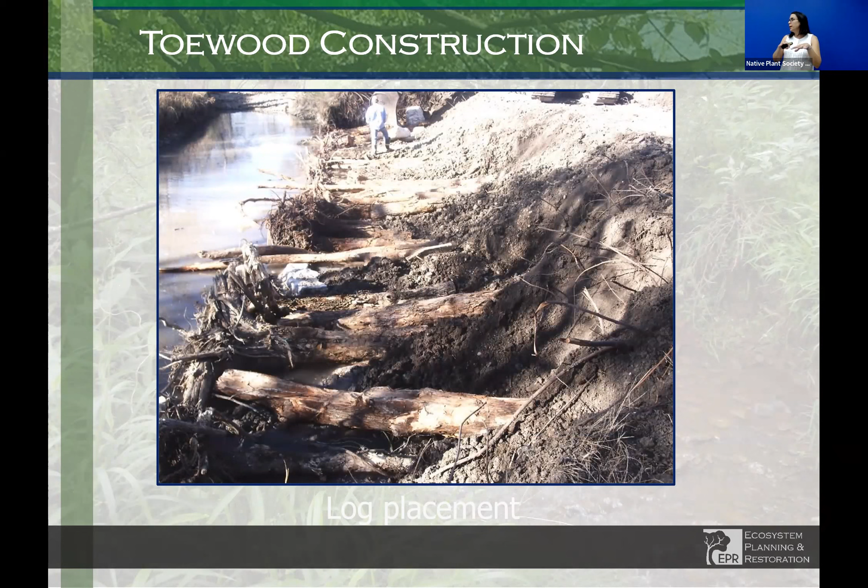Here's a picture of the toe wood construction. These are some footer logs going in, and you'll notice on the left they still have their root wads attached, which provides energy dissipation but is also really good aquatic habitat. Those will be submerged. A lot of these structures using wood we'd only want to use in streams that would cover up that wood all or almost all of the time, so it doesn't rot.

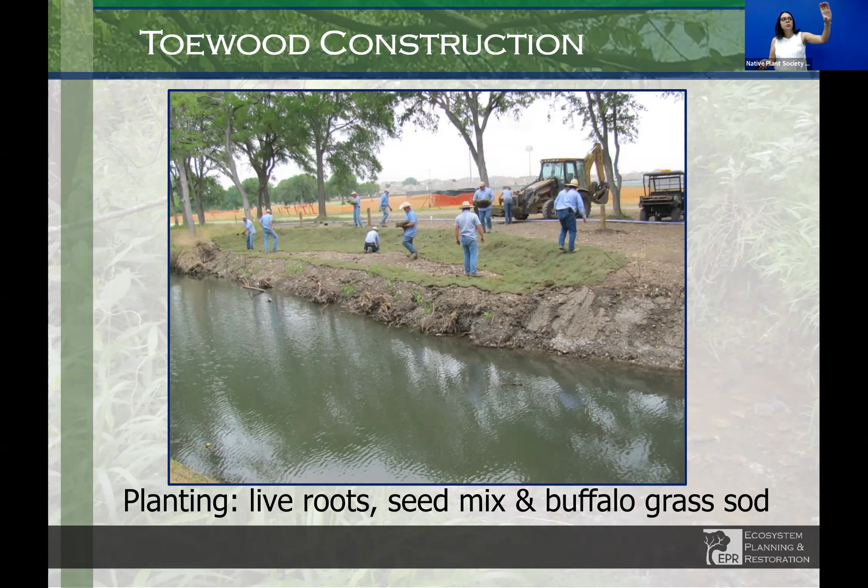You said you worked with SARA, so I know you're a private business. Right now, yes, so you work with the city and SARA on some other projects. Yeah, because we have severe drainage. I live in Sherryville, behind that HEB on West Avenue, it's just a canyon of concrete.

Yeah, you see the stream trying to be a stream, and every year they come through and just pull those all out. Is that in future plans? Well, I'm sure we would love to do that. It really kind of depends on the agency and their goals. If their mission is flood control and they have a budget, it may be hard to steer the ship, but we have done other projects with the city where we presented different alternatives and they've been open to it, and hopefully some of those will be getting built here soon.

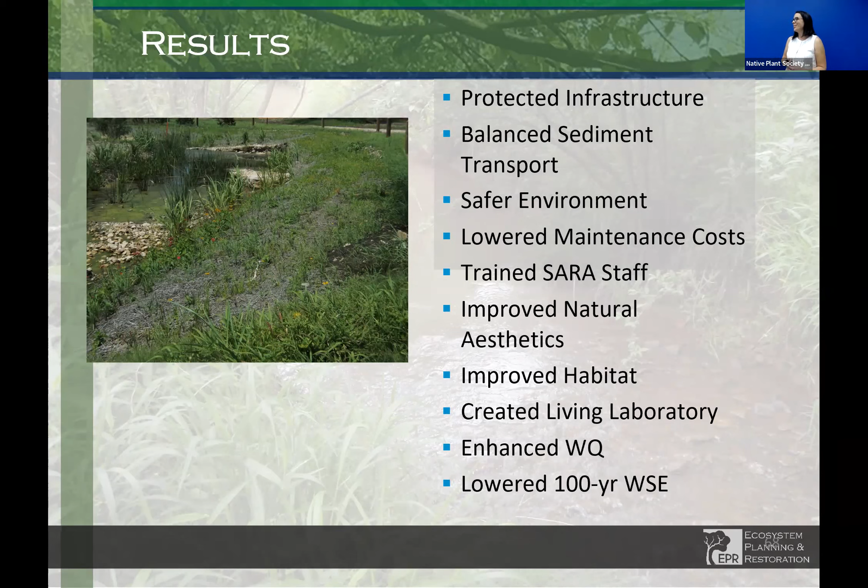So that was a pilot project for SARA's stream restoration program. It's been in the ground 10 years, and there's a video on their website that talks about it. So I think at this point we are done, hopefully in time for questions, and we do have some questions from online, if I can go through those first.

First question: how do these structures work in large events with intense velocities? They work the same. Essentially, when you get to the larger events, the structures are basically swallowed up by the storm event, but just like a natural stream that has the correct dimensions, when the storm goes away, those structures preserve and stay in place, and they keep the channel shape the way that it's supposed to be, so they continue to function even though they're inundated with water.

Next question: is there a maximum velocity where these can be used in an urban area? The maximum velocity is determined by your maximum material size. If you can get a boulder that's big enough to stay in place, then you can use it, and that sometimes comes down to cost too, but it may also depend on what the city will allow. There are certain criteria where they don't want you to go above a certain velocity for safety reasons.